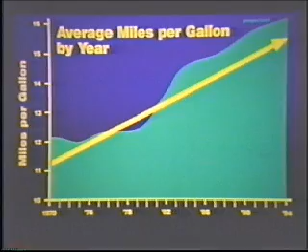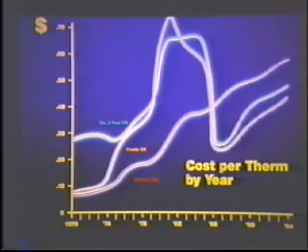Although fuel prices may rise and fall in the short run, the long-term trend is up. And it is in our national interest to rely less on foreign oil and to economize our use of fuel so that generations to come will have vital energy supplies. For these reasons, it makes sense to minimize your fuel consumption. You'll save money and you'll conserve our natural resources.

Although saving fuel and conserving energy are important goals, the words you see on the front of this bulletin that read, "Our business is saving fuel," are not something that was printed there a short time ago. Fuel Efficiency Incorporated has been in the business of saving fuel ever since Walter Brock invented the Turbulator during World War II. In the next few minutes, you'll learn how you may save 6 to 16% of your annual fuel consumption, and of course, save 6 to 16% of your annual fuel cost as well.

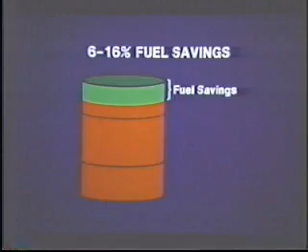Regardless of what business or industry you're in, if you are using gas, oil, or a combination gas-oil fire tube or cast iron sectional boiler to produce heat or power, you can save at least 6%, perhaps as much as 16%. These figures may sound a little far-fetched to you. Certainly you have a right to be skeptical because there are so many fuel-saving devices on the market today, and many of them simply cannot prove their worth.

We can. For example, here are a few of many verified fuel savings reports we have in our files. They compare fuel consumption before and after installation of Brock Fuel Saver turbulators and ensure that the savings were real and verifiable. The reports make the comparison on a degree-day basis and eliminate any savings that might have resulted from milder weather. Here are just a few quotes from these fuel-saving reports. The job cost us $400 and paid for itself in the first 7 or 8 weeks. Our gas bills run $1,500 to $1,600 a month, so the savings created by the Brock turbulators amounts to 14 to 15%. Dwight Alma Dairy Products, Incorporated, Alma, Kansas.

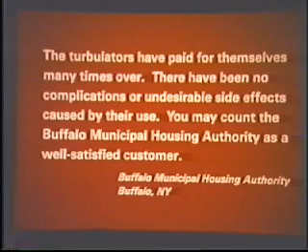The installation of Brock Fuel Saver turbulators has resulted in a 3.4% increase in combustion efficiency in our cast iron sectional boilers and a decrease in stack gas temperatures that averaged 86 degrees Fahrenheit. George Woolridge, Central Bucks, PA School District. The turbulators have paid for themselves many times over. There have been no complications or undesirable side effects caused by their use. You may count the Buffalo Municipal Housing Authority as a well-satisfied customer. Buffalo Municipal Housing Authority, Buffalo, New York.

Our experience shows that, on the average, as a result of using Brock Fuel Saver turbulators, schools are cutting their fuel bills by 12%. Industrial plants by 8%. Greenhouses by 16%. Apartments and condominiums by 9%. Hospitals by 11%. Hotels and motels, 11%. And stores by 13%. In fact, every category of commercial, industrial, and institutional building using Brock turbulators has experienced a significant savings.

For years, Fuel Efficiency has offered this guarantee to customers who are willing to make a valid degree-day comparison. If Brock turbulators don't reduce fuel consumption by at least 6%, we'll remove the product from the customer's boiler and make a full refund for the cost of the product. Some people say, "Sure, I suppose it's possible to cut my fuel consumption by installing turbulators. But couldn't I get the same results by adjusting my burner so that the fuel-air mixture is optimum?"

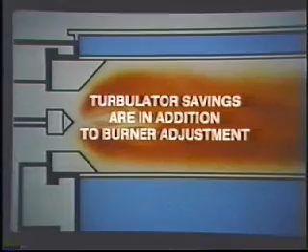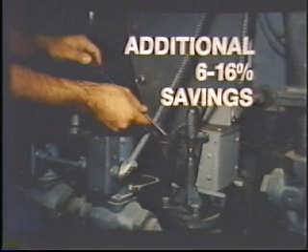The answer is no. The savings from turbulators are in addition to savings resulting from burner adjustment. When we install turbulators, we adjust the burners too. And if a burner is badly out of adjustment, we find that we can frequently reduce fuel consumption by as much as 20%. But even if the burner is adjusted to perfection, we can still save 6 to 16% of the fuel. Perhaps a simple demonstration, the way our dealers perform it, will help you understand how.

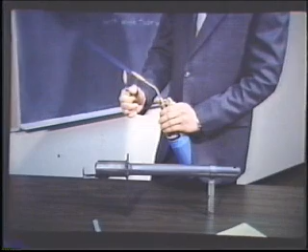This is an ordinary piece of boiler tube with nothing in it. I'm going to light this propane torch and place it in the end of this tube.

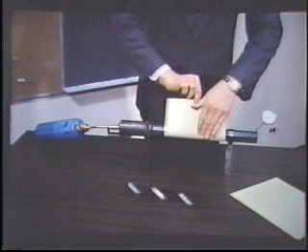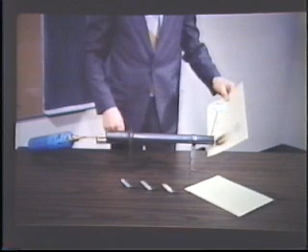Now I'm going to take an ordinary piece of notebook paper and wrap it around the tube. Nothing happens. But when I hold this same piece of paper at the end of the tube, within a few seconds, it bursts into flame. Why? It's because the hot gases are flowing out the tube, but very little heat is being conducted through the tube. As you'll see here, this thermometer shows that the gases leaving the tube have a temperature of 830 degrees.

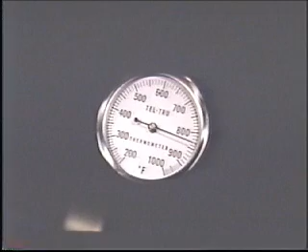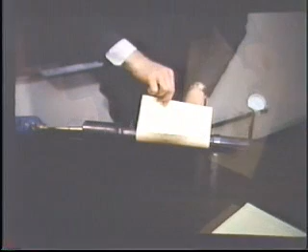In a boiler, this means there's a tendency for too little heat to be transferred through the tube to heat the surrounding water, and a tendency for too much heat to pass out the tube and up the stack where it's wasted. Now I'm going to insert this turbulator into the fire tube. Let's try the same experiment. When I hold the sheet of paper at the end of the tube, nothing happens. But when I wrap this same sheet of paper around the tube, it scorches within a few seconds.

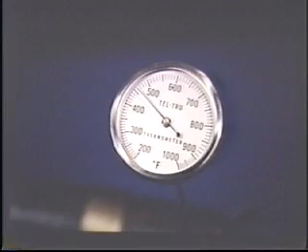Checking the thermometer, you see that the gases passing out the tube aren't nearly as hot, only 460 degrees with the turbulator compared to 830 degrees without. This shows there is a way to reduce the heat being lost up the chimney and put that same heat to work by using it to make hot water or steam in the boiler. And that's how turbulators are demonstrated. Actually, there is a scientific explanation for this.

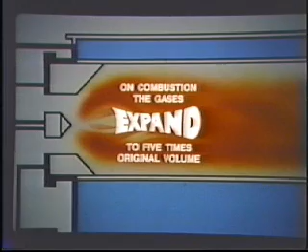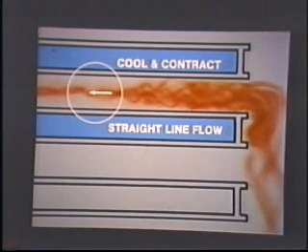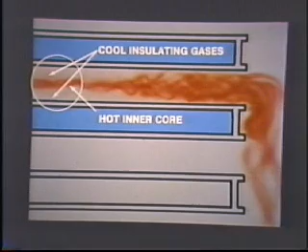As the fuel-air mixture combusts, the gases expand to perhaps 5 times their original volume. These hot gases are turbulent as they enter the tubes, and they give off heat freely. But as these gases cool, they contract. They no longer fill the fire tubes. They lose their turbulence, draw away from the tube walls, and slide forward in a straight line flow. Between this hot inner core and the walls of the tube, there's an insulating layer of cooler gas. These hot gases sliding through the tubes in a straight line flow go up the stack as wasted heat.

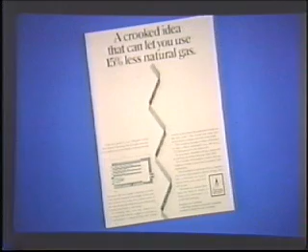This is a Brock fuel saver turbulator. To the casual observer, it may look like a funny-shaped piece of metal. A major gas utility once ran an ad in Time magazine describing it as a crooked way to cut fuel bills. It's crooked only in shape. There's nothing illegal in using it.

In contrast, a turbulator in the same tube breaks up the hot center core, recreates lost turbulence, and scrubs away the barrier of cooler gases. And the heat that formerly was wasted up the stack is now available to heat the surrounding water. This very briefly explains how, with turbulators, you can reduce fuel consumption by increasing the thermal efficiency of your boilers.

Earlier, it was said that when combined with proper burner adjustment, these savings could run as high as 20%. Burner adjustment is important, and it is one of the services dealers perform when they install turbulators. Let's examine why burner adjustment is so important in cutting your heating bills.

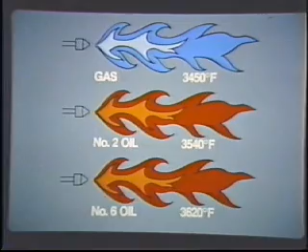Each fuel has a characteristic temperature at which it burns. This is called its flame temperature. For natural gas, the flame temperature is 3,450 degrees Fahrenheit. For number 2 fuel oil, it's 3,540 degrees Fahrenheit. And for number 6 oil, it's 3,620 degrees Fahrenheit. In a laboratory, using a Bunsen burner, it is possible to adjust the gas-air mixture so that the balance is nearly perfect, and you can get close to 3,450 degrees Fahrenheit at this point.

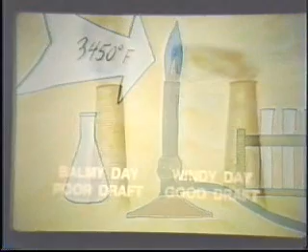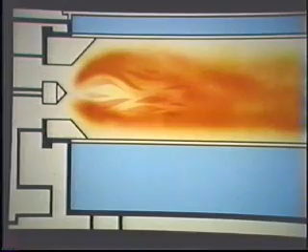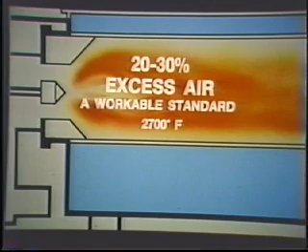But in a boiler, conditions are not perfect. Take draft, for instance. The chimney will pull more on a clear, windy day than on a balmy day. In the combustion chamber, the gas and air may not have a chance to mix thoroughly and burn. So, in order to ensure complete combustion, 20 to 30% excess air is usually added. This excess air dilutes the flame temperature down to 2,700 degrees Fahrenheit, a good workable standard.

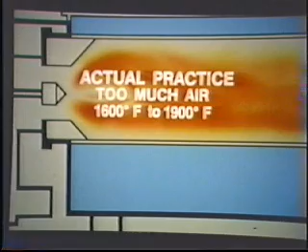However, in actual practice, our installers find that many burners are poorly adjusted and are firing at 1,600 to 1,900 degrees Fahrenheit. Temperatures this low in the combustion chamber indicate there's too much air in relation to the amount of fuel. Or, to put it simply, the flame is being air-cooled just to make sure the gases are burned.

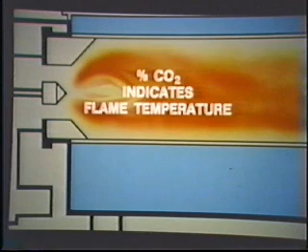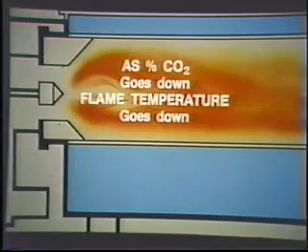As the fuel burns, carbon dioxide is formed. In fact, if one measures the percent of carbon dioxide present in the combustion chamber, he can accurately predict the flame temperature. If the percentage of carbon dioxide is low, he knows there is excess air that is cooling the flame temperature. In other words, as the percentage of carbon dioxide goes down, the flame temperature goes down.

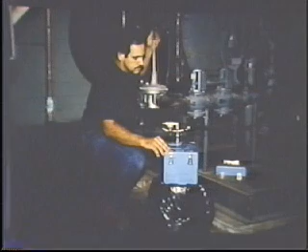When our dealer installs turbulators, he checks the carbon dioxide content of the stack gases. Then he adjusts the burner to give you the correct carbon dioxide balance for the type of fuel you are using. Turbulators help you get the proper carbon dioxide balance, achieve higher temperatures in the combustion chamber, and reduce the need for excess air in order to achieve complete combustion. The undesirable air cooling effect is minimized.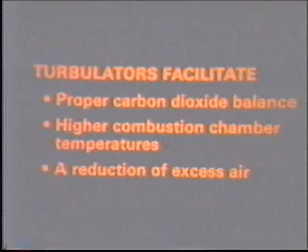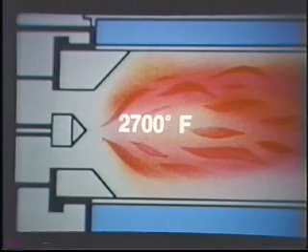This cross-sectional view of a boiler without turbulators will help you to understand how this happens. Let's assume the burner is properly adjusted and that the temperature in the combustion chamber is 2,700 degrees. As the gases burn, they are turbulent, but because they are hot, they rise rapidly, filling the top and center tubes, scanting the lower tubes.

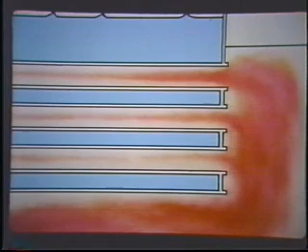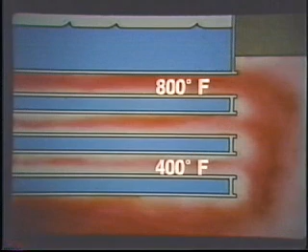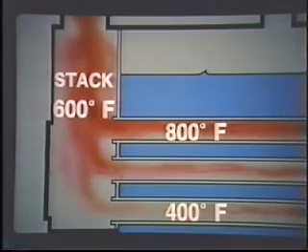In the fire tubes, the gases form the characteristic hot inner cores. The heat is unequally distributed through the tubes. The temperatures in the top tubes may be 800 degrees or more, and the lower tubes may be as little as 400 degrees. The stack temperature may average 600 degrees as shown here, or even hotter.

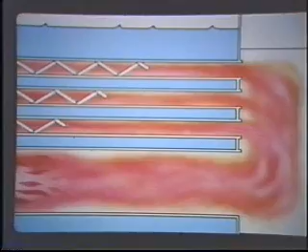Here is the same boiler with Brock Fuel Saver turbulators. Notice that the combustion chamber and rear turnaround section are more completely filled with hot gases. There's more turbulence, and the hot gases are in intimate contact with the walls of the fire tubes. All the tubes from top to bottom now carry equal heat. All do equal work. Heating surfaces are utilized more efficiently.

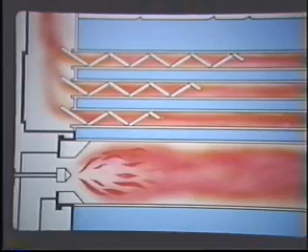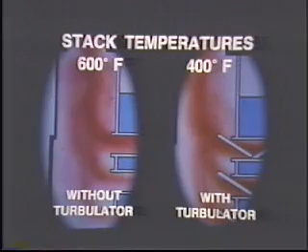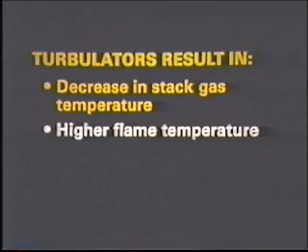Also notice that the stack temperature is only 400 degrees compared to 600 degrees in the previous illustration. This means that less heat is being wasted up the chimney. When turbulators are installed in your boiler, you'll know they're doing their job because the changes can be measured quickly. You'll notice a decrease in stack gas temperature. You'll notice an increase in CO2, indicating a higher flame temperature. You'll notice an increase in boiler capacity, or what's more important to most, a decrease in fuel consumption.

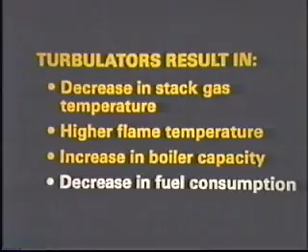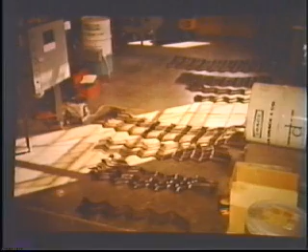It's only natural that people want to know whether turbulators cause any maintenance problems in boilers. For instance, they ask, do turbulators cause boilers to soot up more than normal? The answer? An emphatic no. You see, soot is caused by the incomplete combustion of the fuel. Turbulators help to make combustion complete by stabilizing the draft. Often, users tell us, hey, we only had to clean our boiler once this year. Before the turbulators, we had to clean our boiler 2 or 3 times. Savings like these, in labor and convenience, are typical. When cleaning a boiler, the turbulators are easily removed and easily reinserted after cleaning.

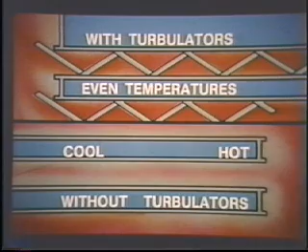Another natural concern is, can turbulators in any way damage my boiler? Again, an emphatic no. Turbulators tend to increase boiler life because they spread the heat more evenly through the tubes, eliminating hot and cool spots, balancing the load on the fire tubes, and decreasing thermal stress. In the history of fuel efficiency, there have been no boiler failures due to the installation of turbulators. And if for any reason a boiler should overheat, the turbulators would simply flatten out in the tubes, so the added heat transfer stops before damage can occur.

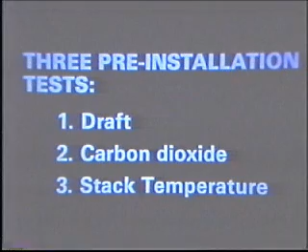Before installing turbulators, the dealer will make 3 important tests of your boiler: draft, CO2 reading, and stack temperature. These tests take less than 20 minutes and will not harm the boiler. But they are essential if the installation of turbulators is to save you as much fuel as possible. You might compare these 3 tests to your doctor's checking your pulse, heartbeat, and blood pressure. A small hole will be drilled into the stack, and a CO2 analyzer will be inserted. This will indicate the air-fuel ratio. Too much air is wasteful because it cools the entire boiler system and performs no work.

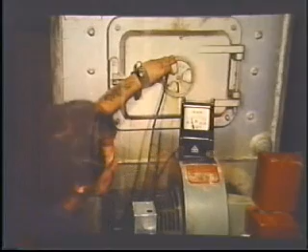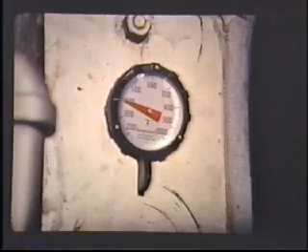Next, using a draft gauge, the dealer will check the overfire draft. Excessive draft is wasteful. Zero smoke on gas or light oil is a must. The lighter the smoke on heavy oil, the better. With gas, no carbon monoxide is acceptable. With non-pressurized burner equipment, some overfire draft is a must. Finally, the installer will insert a long-stemmed thermometer and measure the stack temperature. This indicates how well the boiler is absorbing available heat. These 3 simple tests enable him to install the turbulators properly and give you assurance that your boiler will be operating at peak efficiency and decreasing your fuel consumption by at least 6% and possibly as high as 20%.

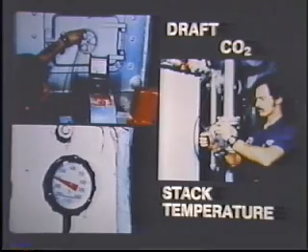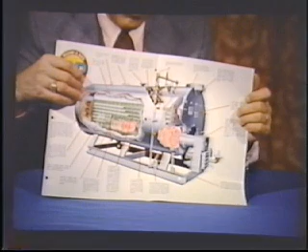When fuel efficiency tells of savings of that magnitude, people often think turbulators must be costly. Actually, they're not. The cost will vary depending on the number and size of the fire tubes in the boiler, but the cost is amazingly low. In fact, fuel savings during the first heating season usually more than pay for the cost of the turbulators. And since turbulators are expected to last as long as your boiler, the savings keep accumulating year after year. As further proof that turbulators increase boiler efficiency, many of the nation's leading boiler manufacturers make turbulators available with new boilers they sell. In fact, turbulators are shown in some of their catalogs.

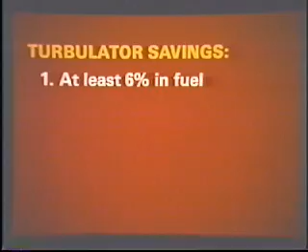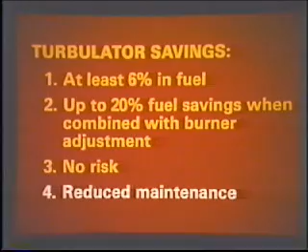To summarize what's been said in the last few minutes, you can reduce your fuel consumption and fuel costs by at least 6% by using turbulators. Savings of up to 16% are not unusual. Some have saved as much as 20% when the savings of turbulators are combined with those made possible through improved burner adjustment. Furthermore, fuel savings are guaranteed. There is no risk involved because turbulators tend to extend boiler life by minimizing thermal stress. Finally, turbulators tend to reduce maintenance and cleaning costs. Prove it to yourself by having your dealer install turbulators in your boiler. Then, after analyzing your own records, you'll see that these savings